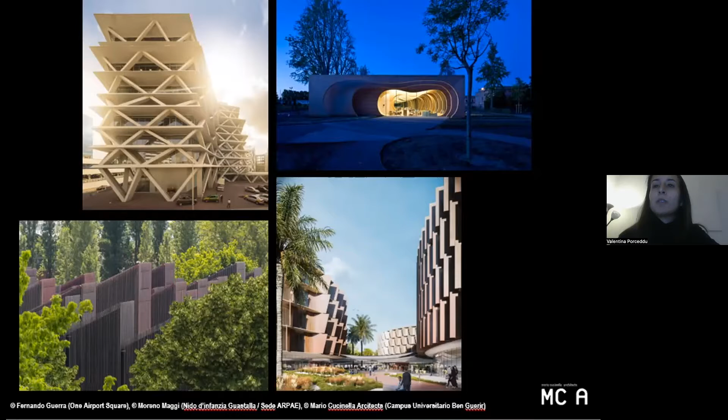Among our recent experiences, there is also TECLA, a well-known project, and the name stands for technology and clay. The project itself is rooted in a research phase carried out by students of the School of Sustainability, a postgraduate course that runs in parallel with the activity of the office. But the final materialization of the project is the result of the combined effort between MCA for architecture and WASP for 3D printing. The whole process also included a number of Italian-based firms for other aspects, such as furniture and mix design of the soil to be printed, and so on.

TECLA is also inspired by Italo Calvino's Invisible Cities, because in the book, Tecla is the city undergoing a continuous construction process. Dear to us is also the concept of combining together the past and the present - the past meaning vernacular knowledge, vernacular architecture, natural and local material like raw earth, together with what is new: technology, in this case 3D printing and additive manufacturing, which is for sure one of the disruptive technologies of the 21st century.

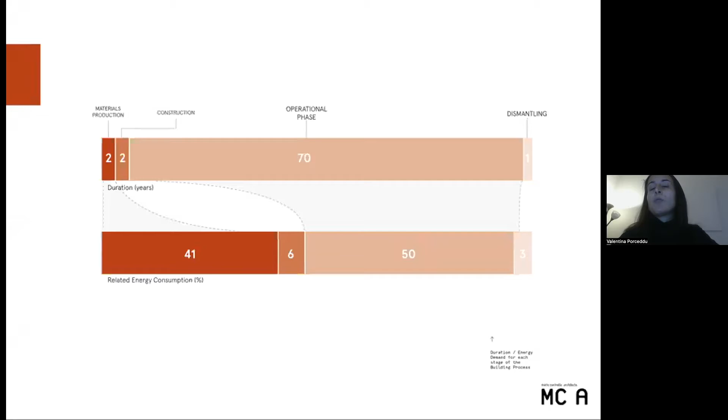As architects, we tend to frame the issue of sustainability always or often in terms of efficiency, so we focus most of the time on the operational phase, which is good, but maybe not enough. We don't need just to design and realize buildings that consume less, but also pay attention to the whole life cycle of an architecture - considering the material production, the components production, the construction phase, until the end of life, and what kind of end-of-life scenario we can imagine for our buildings. There's then another challenge, which is the increase of population and demographic trends that will result in an increased housing demand.

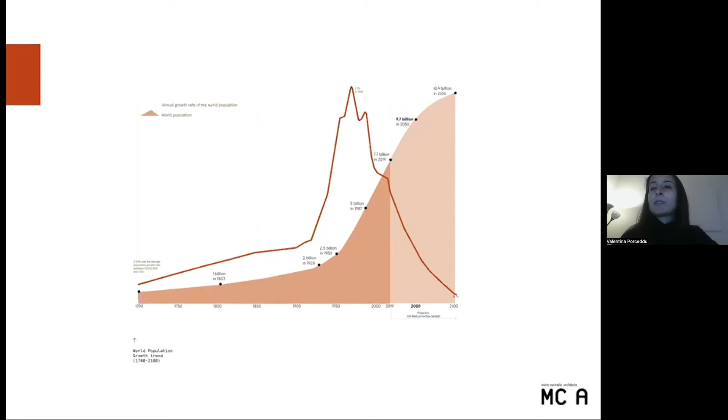This housing demand and the demographic trends are, of course, not evenly distributed all over the world. We know that for sure it will hit mainly the south part of the world. Yes, one solution we have is redeveloping existing buildings, but new buildings will still exist, and we have to try to think about alternatives in the way we design and deliver our construction.

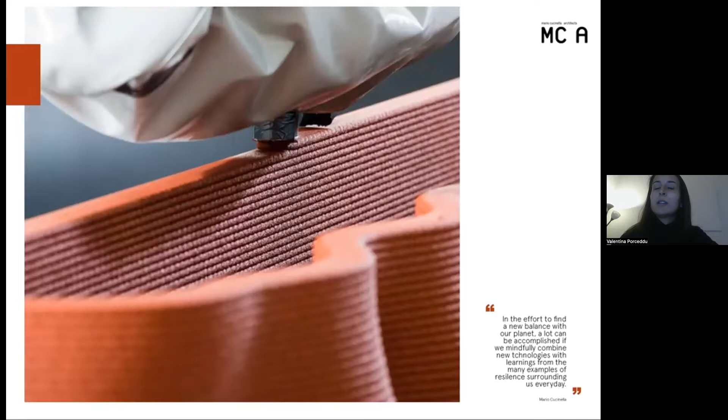So we feel the need with this project to deepen and explore a bit more how new technologies might be helpful in tackling those issues. 3D printing, for us, is not the all-in-one solution, but it's for sure a topic worth exploration and research. There's full of data about the benefits of this technology, but I like to remember a sentence by Cedric Price, who once said that technology is the answer, or might be the answer, but sometimes we forget what was the question.

For instance, it's true that especially if it will be consolidated over time, 3D printing will allow us to construct in shorter times. But we need to ask ourselves, shorter times for what? For feeding the urban sprawl, or for instance, trying to find an answer for emergency contexts. And this is one topic.

Another one is that we have to lower the cost. So we need to probably combine 3D printing with other emerging technology and other kinds of knowledge, especially trying to embed into 3D printing standardization, in order to make dwellings and every kind of architecture affordable for people.

And lastly, also emissions, not just the emissions produced to operate a building, but also emissions produced for the material itself. There are a lot of projects all over the world that use a lot of cement for 3D printing, but this is just a new way to do old things.

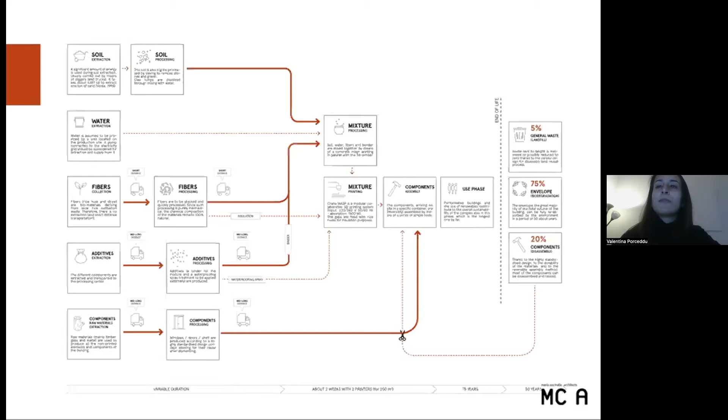So basically the research is trying to go on in developing more sustainable solutions, and this requires efforts put in place time by time. Going through the research, we particularly appreciate vernacular architecture as inspiration, because in vernacular architecture, beauty is not randomly conceived. It is always the result of an awareness about structural needs, environmental needs, and technical needs more in general.

We decided to focus on the dome, which is an archetypical shape of vernacular architecture, both for structural reasons that are well combined with 3D printing, but also because it's important to consider the feeling of the final user. For instance, every time our founder describes TECLA, he always says this is like a welcoming belly made of raw earth that embraces the final user. So it's important also to consider the feeling of the final user.

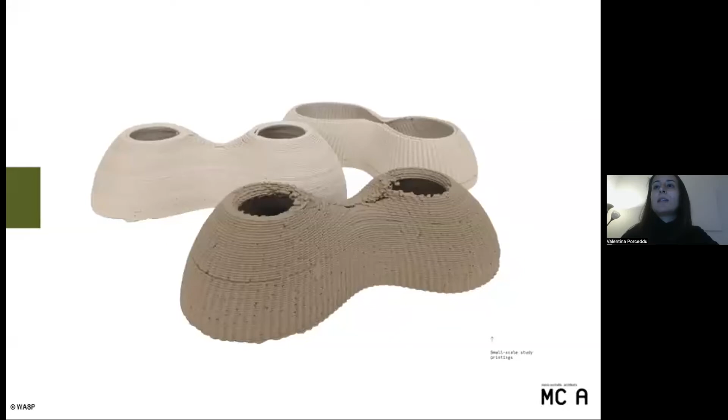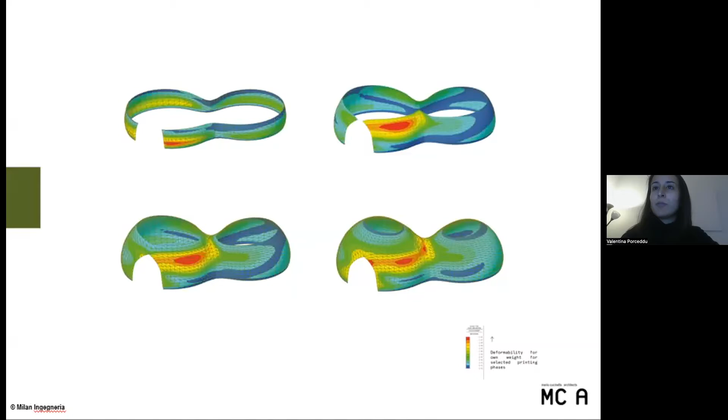Focusing on one aspect of the architecture, which is the infill, the envelope of the building, this was an interesting idea developed by the students of our postgraduate master.

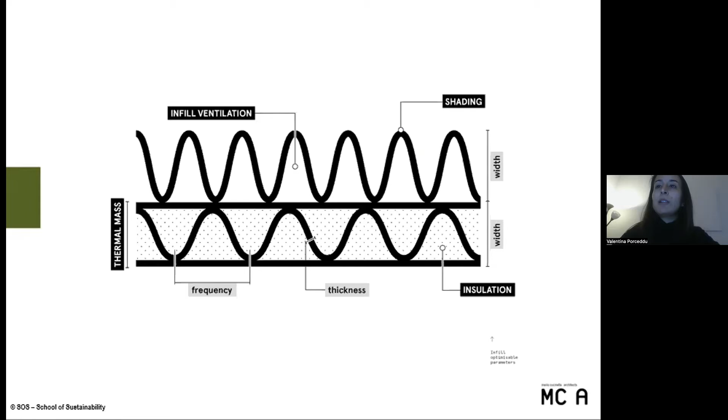So the envelope was constituted by this kind of double sine curve, in which multiple functions and multiple performances are provided. The internal layer provides both thermal insulation to avoid too many heat losses, and thermal inertia, which is particularly helpful especially in summer, while the external layer, the external curve, provides both self-shading to the building, useful to control direct solar radiation, and infill ventilation.

The idea, which is for sure interesting and needs to be further explored, is that we can maybe play with the density and thickness of the sine curve and the envelope in order to meet the needs of architecture at different latitudes, because, for instance, thermal insulation is not always needed and not always in the same way, and the same for thermal inertia and so on.

Of course, you need to pay attention also to the soil characteristics, because it's true that soil is widely available, but it's also true that not every soil is suitable for construction. So if you have the soil on site but it needs too many additives, maybe it's not the right technology.

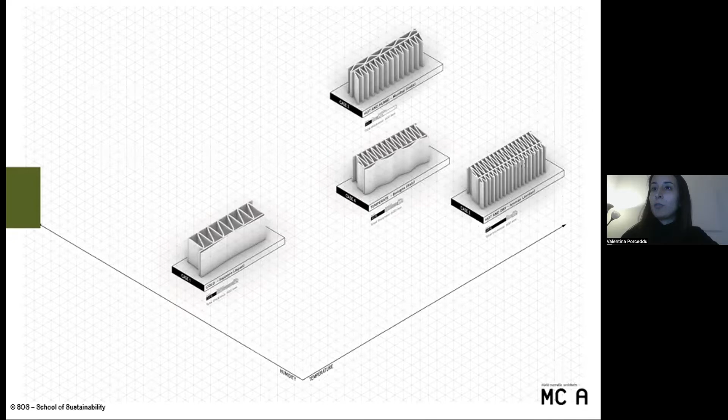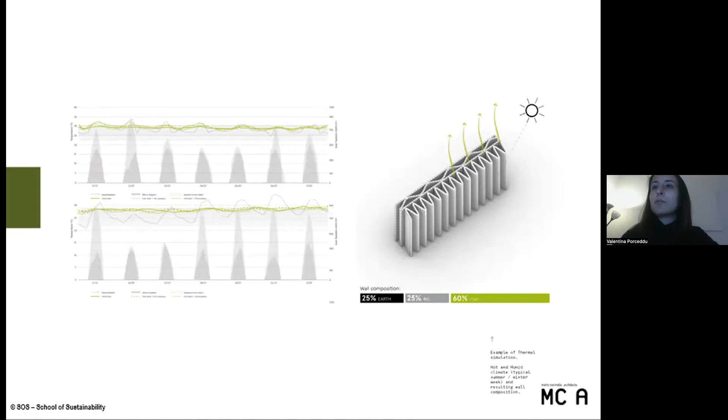Together with developing these infill alternatives, we were able, together with the students, to perform thermal simulations using the software and other tools we have within the office.

Moving to the prototype, the idea behind this residential unit is to try to create a family of solutions, not just a solution, even if we came up printing just one prototype. The idea is wider. All solutions in the family share the same principle: merging past and future.

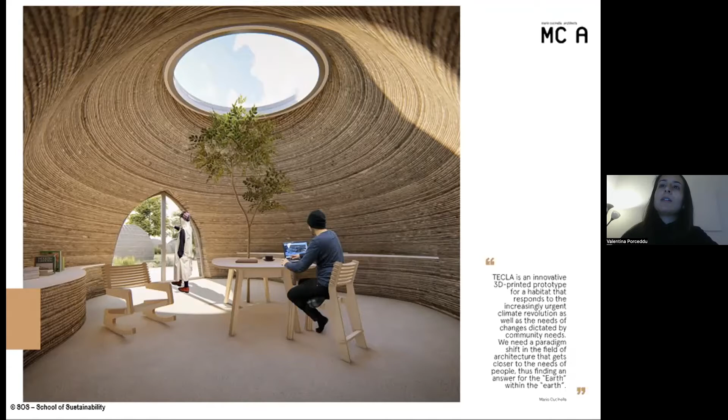So vernacular architecture and this dome shape with some openings, together with 3D printing. But these shapes slightly change according to the specific location, together with the position and dimension of the openings and the characteristics of the envelope.

Another important point is that printing raw earth, and printing in architecture in general, is challenging because it requires rethinking and revolutionizing the whole design process. So we worked side by side with Mapei for the mix design and WASP for 3D printing, in total continuity. It was not a classical, business-as-usual approach.

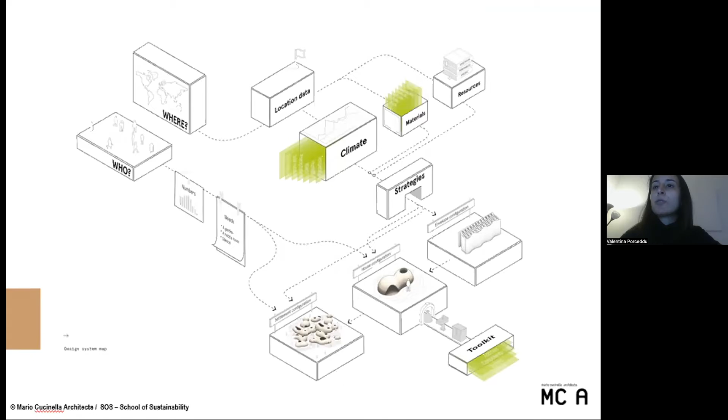With special attention to the raw materials, you need first of all to think where and for whom - to understand the climate and the natural materials that are available - and then start to prototype in order to customize the envelope, the shape of the building at the architectural scale, and also the logic and rules behind the aggregation of multiple modules in case you want to deliver a whole master plan.

So all the typologies we thought about shared again the idea of the dome, which is particularly interesting because it allows us to avoid the use of formworks that might be an obstacle for the 3D printing machine, and of course the openings.

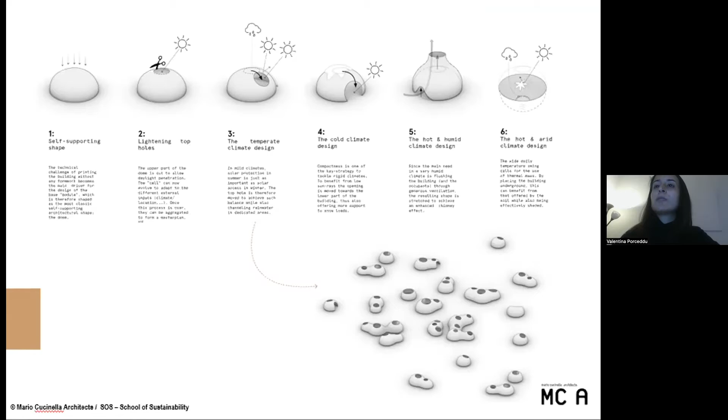But the position of the openings and the shape of the buildings slightly change according to the context, in order to really meet the conditions of each site. For instance, in cold climates, the best strategy is to look for compactness, because you need to avoid heat losses as much as you can.

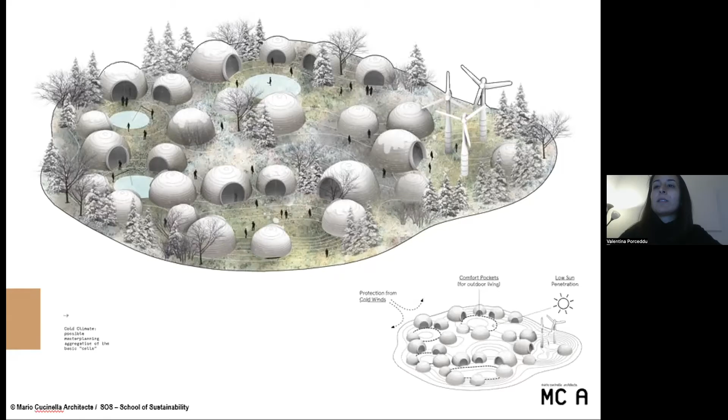On a master plan scale, it's important to provide mutual protection between the dwellings from cold winds. This is possible by arranging the individual housing units closer together and leaving at the center small comfort pockets that are protected from cold winds.

Moving to the architectural scale, we can see how the opening is moved to the south exposition in order to catch the sun rays, which are particularly low in these locations, and also to exploit as much as possible the heat given by the sun, which is of course not so much.

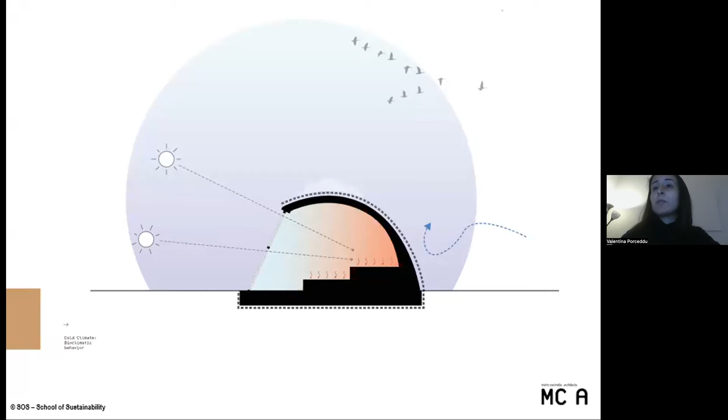On the other side, on the back of the building and also on top, we have a more opaque envelope, considering the north side to provide protection from winds, and considering the roof, to help it bear the load of snow. This is a quick visualization of the final result.

Then we move to the humid climates. In humid climates, the principle is the opposite: you need to give more space among the units in order to enhance permeability, which is the best strategy because we don't have huge thermal daily swings, so we cannot rely totally on thermal inertia - it's not a suitable strategy.

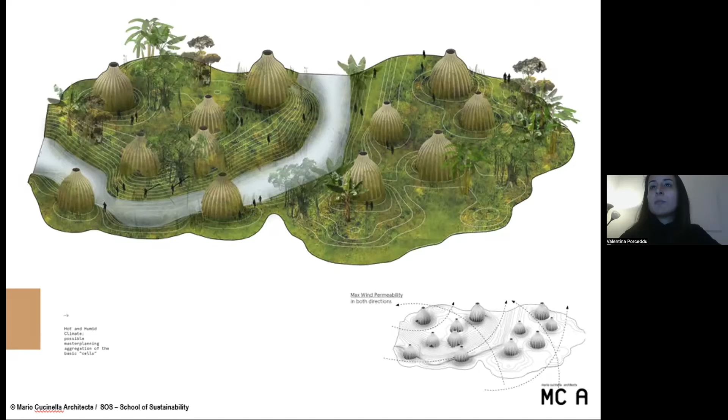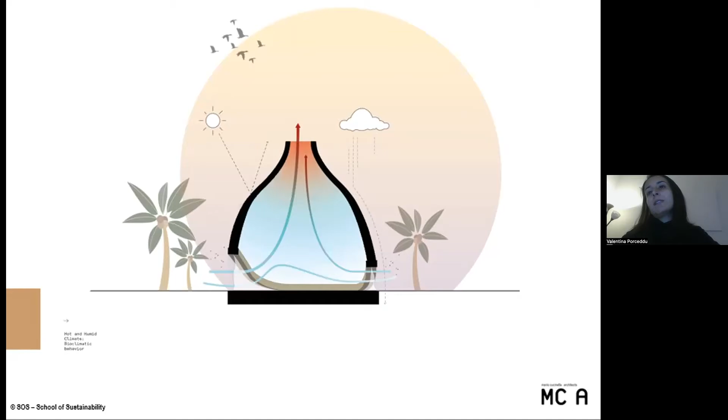So we need to promote ventilation, and this is true also at the architectural scale. That's why we decided to imagine opening more doors and windows all over the perimeter of the prototype, and also to stretch the dome a bit in order to promote two mechanisms of ventilation: cross ventilation and ventilation by stack effect. This is more or less the idea and the aesthetic.

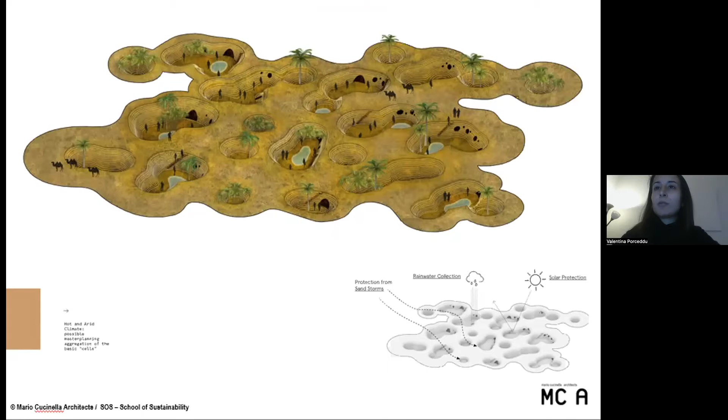In arid climates, communities instead tend to seek comfort going downwards into the ground, because they want to exploit the thermal inertia, and also because going downwards makes it possible to provide protection from sandstorms and also to collect rainwater, which is precious since it doesn't rain so often. So it's important not just to provide shelter, but also to think about other resources that might be helpful during the life within this unit.

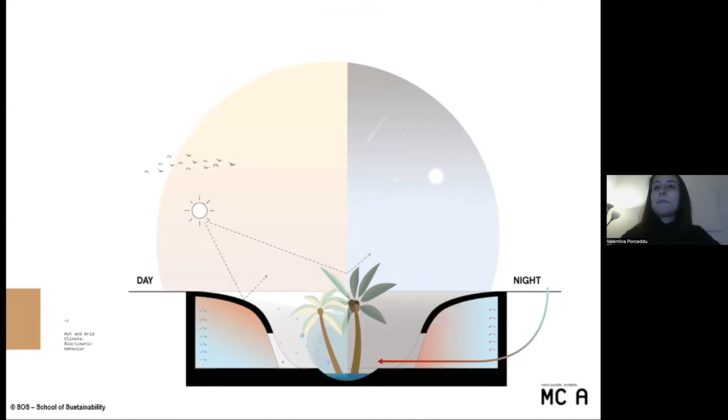Moving to the architectural scale, we can see how there is this mechanism of thermal inertia, thanks to which the ground and the house exchange heat gradually, moving from night to day. We also have the creation of patios, thanks to which the fronts of the building are mutually shaded. This allows the creation of a kind of small oasis, a kind of treasure within the desert.

And then we have maybe, at least for me, the most challenging climate, because it represents basically an average condition of the previous ones. So it's not easy to find a clear interpretation. It's necessary to balance conflicting needs: to balance heat loads and heat losses, to protect from winds on one side, but also to favor permeability. And this, of course, changes a lot according to the location, at least in Italy.

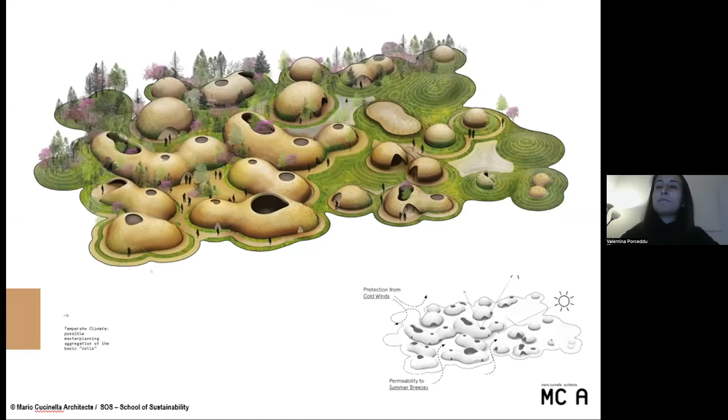So this is a kind of average typology compared to the others, because we have openings on the perimeter that need to be shaded, and the window-to-wall ratio, the amount of glazing compared to the opaque components, needs to be weighted. And we have also openings on the top, so skylights equipped with movable shading, because sometimes we want solar radiation, sometimes not.

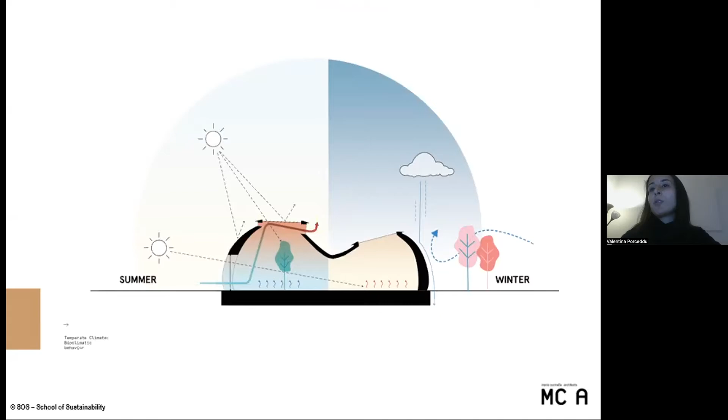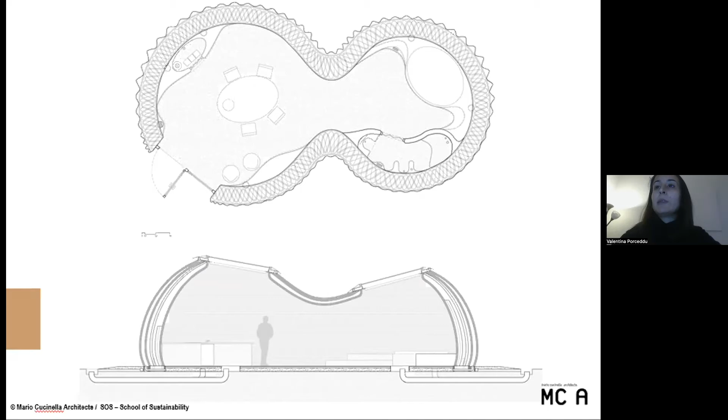And this is the final image before starting to print the prototype. As you can see, it's not a huge prototype. It's a housing unit of around 45 square meters of net area. The layout is arranged so that we have two main rooms: the living room equipped with a kitchen, and the bedroom with services.

And also the furniture is important. As you can see, with this organic shape, it's not easy to provide furniture. That's why we have collaborated with local firms in order to exploit the potential of CNC and parametric design, and try to develop more knowledge also for that sector.

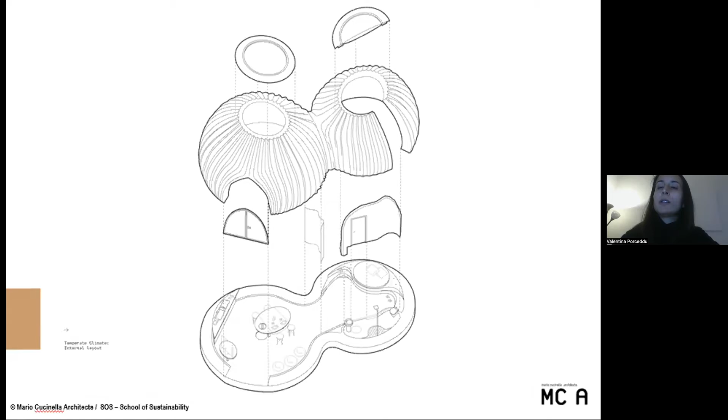This is something related to what I was talking about before: we need to combine this organic shape together with standardization. That's the real challenge. For instance, at the moment we are reflecting a lot on how we can focus more on the window frames, because we would like to design something that seems irregular but is actually suitable for installing standard frames already available on the market, since this has a side effect on the affordability of this unit.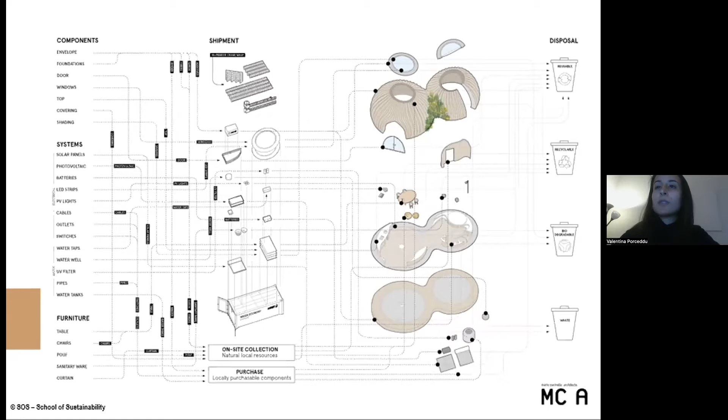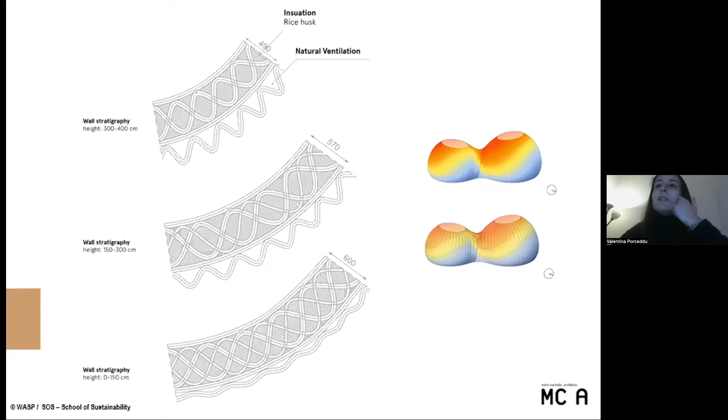And here you see a progressive section of the envelope going from the bottom of the building to the top. As you can see, it reflects basically the result of a solar radiation analysis, so the external layer is more dense where shading is more needed.

Here, a really quick section showing the bioclimatic principle of this project. First of all, the skin and this roughness, which is motivated by the relationship with the sun. Thanks to Grasshopper and other kinds of parametric software, we are able to remap the values of the solar radiation all over the envelope in order to create a responsive skin.

The shading system for the skylight, also using Grasshopper or other tools, lets us control and establish a dialogue with our consultants for mixed design and for structures. They control the slope of the envelope, because we want to promote as much as we can water drainage, first with the shape of the building, then thinking about the mix, and so on with other elements that can be embedded into architecture.

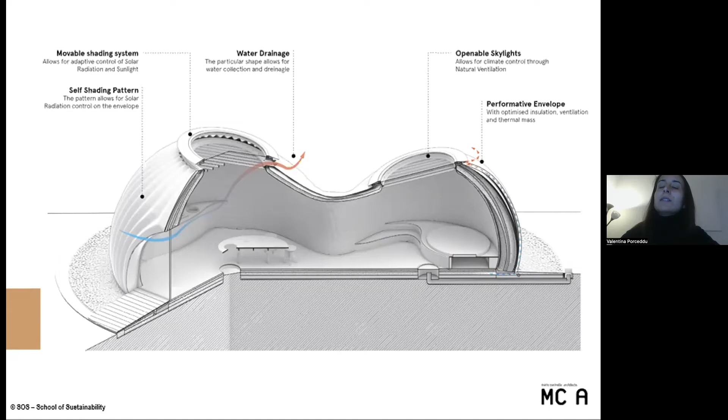And we have the envelope. The envelope was insulated with rice husk, another byproduct of agriculture typical of the Po Valley here in Italy. So it's something that would be waste if not used as insulation, and it's all inside this idea of creating a circular economy around the prototype.

Here you see a scheme illustrating the kind of printing machine we used, thanks to WASP. There are basically two main families of 3D printing machines. One is the Cartesian, a printing machine with two axes of movement, the X and Y axis, and this one, which is the delta, where you have one or multiple arms moving on polar coordinates. This gives you freedom to design these kinds of complex shapes.

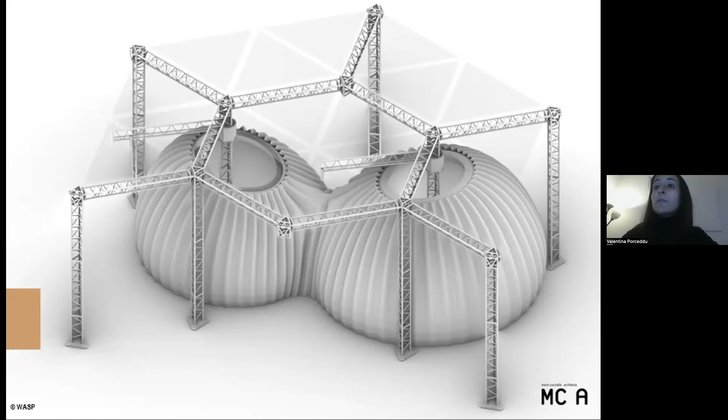Here is a close-up on the envelope during the process, and here you can see the prototype during the construction process. Looking at the prototype from above, you can see how each arm of the printing machine is able to print an area of around 50 square meters.

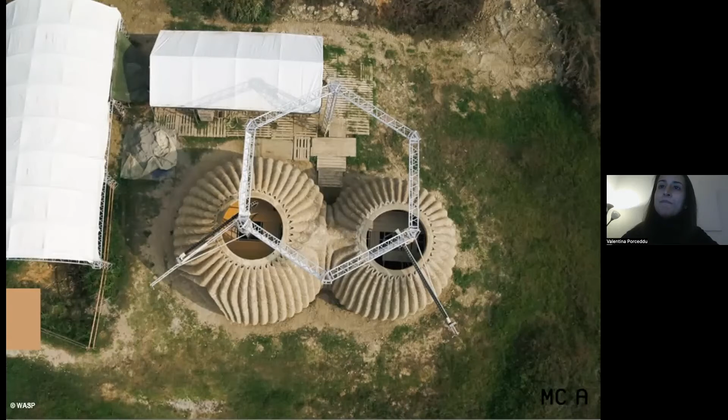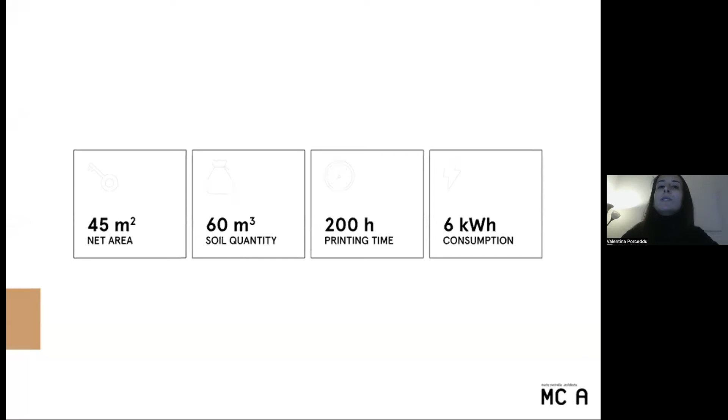Some data about the project: again, it is a small unit of 45 square meters, which required 60 cubic meters of soil. The printing time was around 200 hours, and the electric consumption for the construction was negligible compared to the standard in the construction industry. Obviously, it's better if you're able, as in this case, to cover this consumption from renewable sources. So thank you.